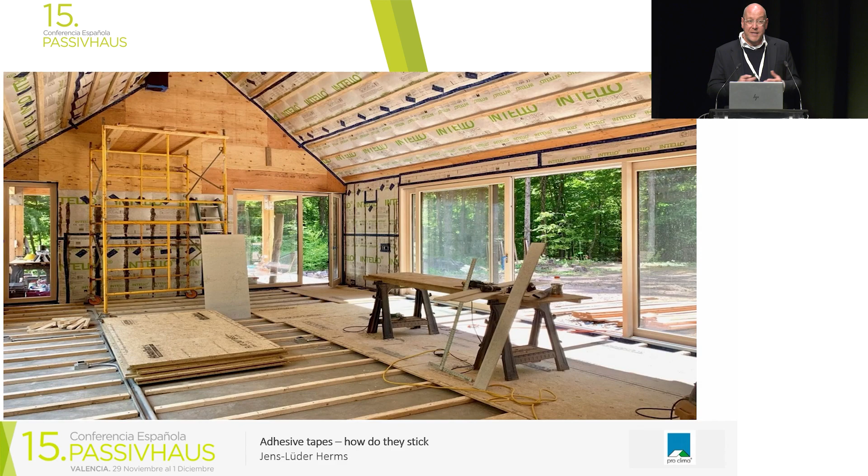But one question comes up very often to me: aren't all air tightness tapes the same? Because when we look at the tapes, of course they have different carrier materials. Some of them are made out of paper, some of PE foil, some of Spunbond. But when we turn them around and remove the release liner, we see the glue. The glue is crystal clear, and the glue looks very similar. And when we look at the technical data sheets of the adhesive tapes, they appear to be very similar as well.

They are all sticking to nearly all surfaces we find on the building site. They are all durable. They have similar age resistance. They have a similar temperature range. But when it comes to the price, then we see, wow, there's a difference. There are very cheap ones and there are very expensive ones. I'd like to show you today where the difference is in this common building material we're using.

So first, I'd like to start with the production. We have two ways to produce the glue used in these tapes. The most common one is so-called acrylic dispersion glue. Acrylic dispersion glue means the glue is produced out of dispersion. The dispersions used look like this—it's a very liquid material, it looks like milk, so it's white.

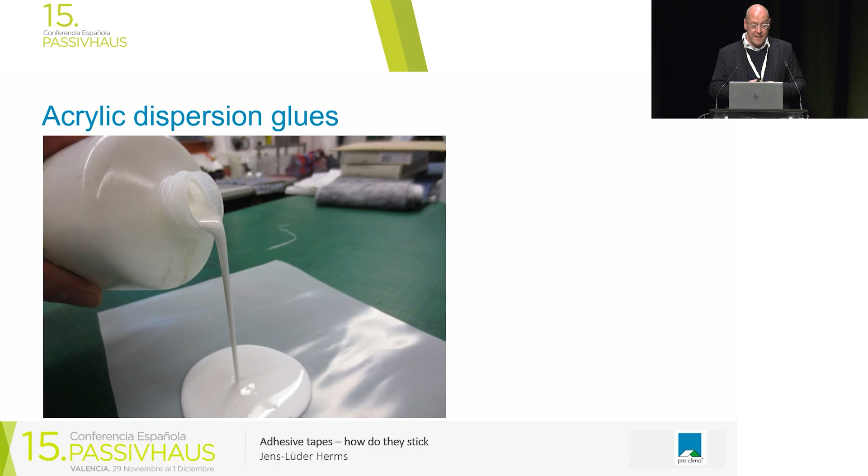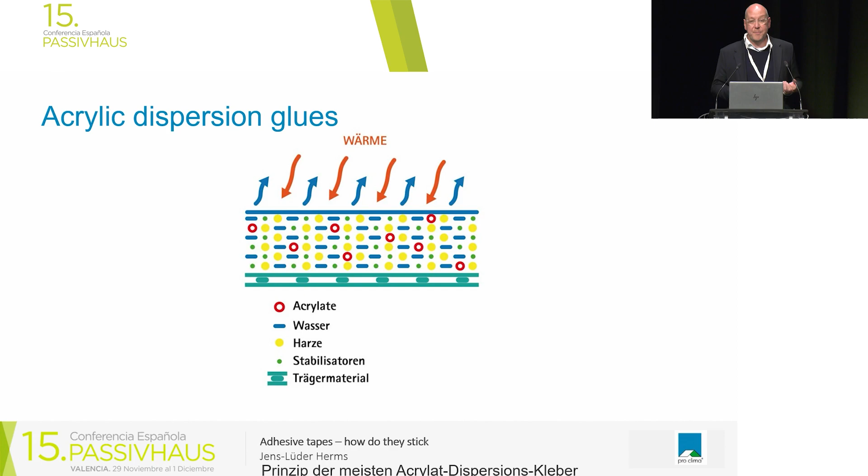This dispersion contains different ingredients. We have acrylics inside, we have resins inside, we have water and stabilizers which are responsible for keeping the dispersion stable, so the resins don't float above and the acrylics don't sink down. This dispersion is applied in a certain thickness on the carrier material, and then it's transported through a heat oven. We heat it up, the water evaporates, and during this process, the dispersion turns from white to crystal clear, as we know the acrylic glues. When all the water is gone, the acrylics come in contact and create longer chains.

Besides the acrylics, there are some resins in the glue. Resins are there to make the tape extremely sticky. Everybody knows resins from wood—when you cut wood, the resin comes out, and it's extremely sticky. But what may happen with resins after time is they get hard. The same can happen with the artificial resins used in cheap acrylic dispersion glue. They are not designed to be age stable, so it's not very good to have them in a tape.

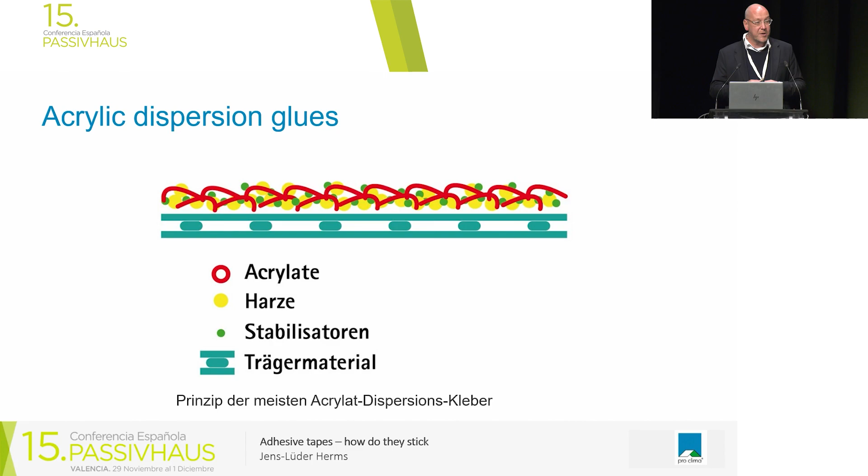The second thing which remains in the glue is the stabilizers, which were responsible for reacting with water to create a stable dispersion. The problem is that if they get in contact with water again, they will react with it. So every acrylic dispersion glue is absorbing water. I'll show you later what this might mean as a consequence when we have it in the building.

The modern glues are the solid glues. They are used, I guess, in 10 to 15% of all available tapes in the market, and the production is a little bit different. We start with the carrier material—it's 1 to 1.50 meters wide.

This carrier material is as well coated with the glue. But you see here the difference. The glue is not solved in water. It comes to the surface in a pure acrylic in a very liquid form. It is very liquid because it consists of very short solid acrylic chains, which are not connected with each other.

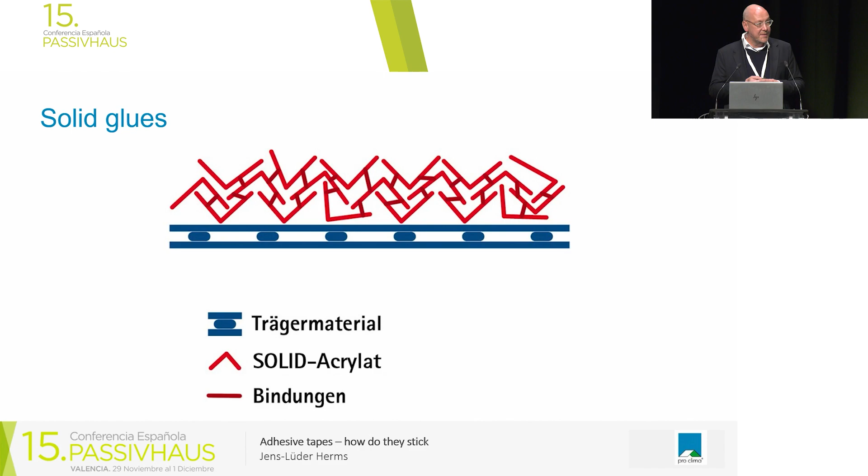During the production, you can bring energy to the surface, and then they are creating these bindings between the short chains. So during the production, you can decide if you want to have a very hard or a very soft glue. The good thing is that this glue is free of stabilizers, of emulsifiers, and it has normally no resins inside.

There can be a very small content, but in general they are resin-free. The good thing is there are no stabilizers inside, and so the glue is absolutely water safe. It's not getting water in its structure. Good, this is the difference between the production.

But how does the tape stick? When we want to understand this, we have to consider two forces. We have on the one hand adhesion. Adhesion makes a connection of the glue with the surface. And the second force is cohesion. This means the inner strength of the glue. If we have stress on the connection, the stress transports through the glue to the other side, so that we have a good bonding.

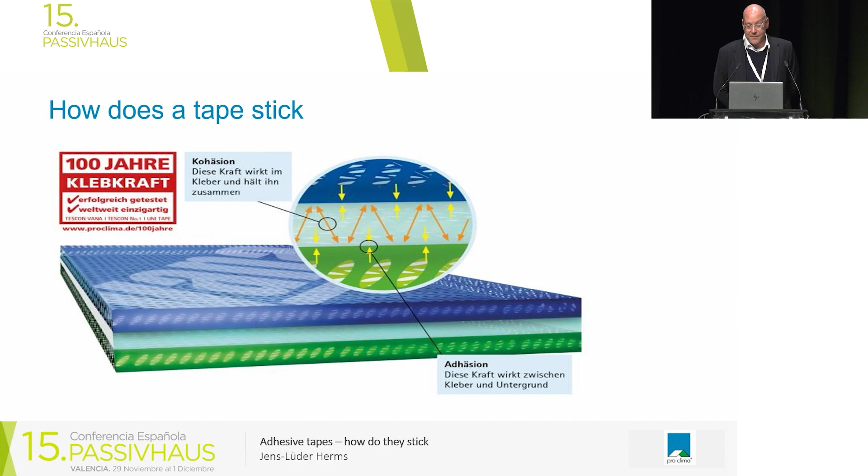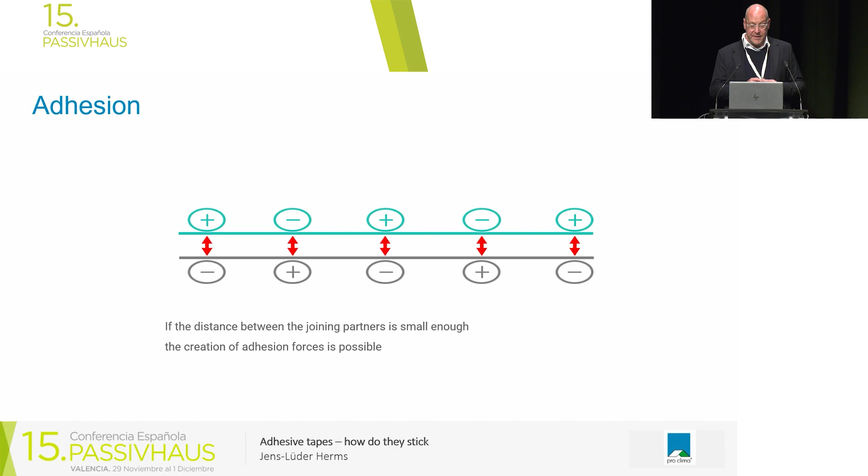Adhesion always occurs when we bring two surfaces which have a high energy level close to each other. And when they are very close, they can create this chemical adhesive bonding. This is very important, to bring it close to each other, because when we take a look how a membrane looks like under the microscope, then it's very uneven.

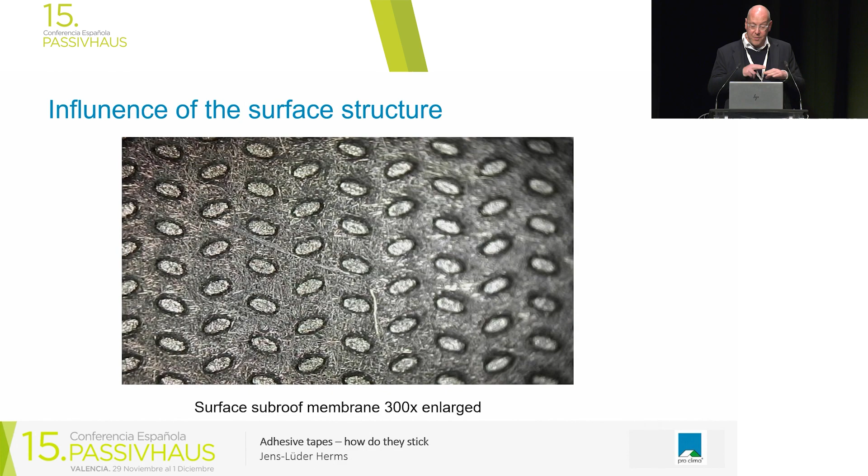And when we bring it to a theoretical image, a subroof membrane looks a little bit like this. It is a very structured surface. And the better the glue can follow this structure, the longer the distance is where we can create adhesion, and the better the connection is.

This is why all the glues for airtightness are called PSA glues. This means PSA means pressure sensitive adhesive. And we have to press them to the ground. We can use our fingers, or we can use a tool like this press fix here, or we can use a roller. But the intention is to press the glue into the structure so that we create a very strong bonding.

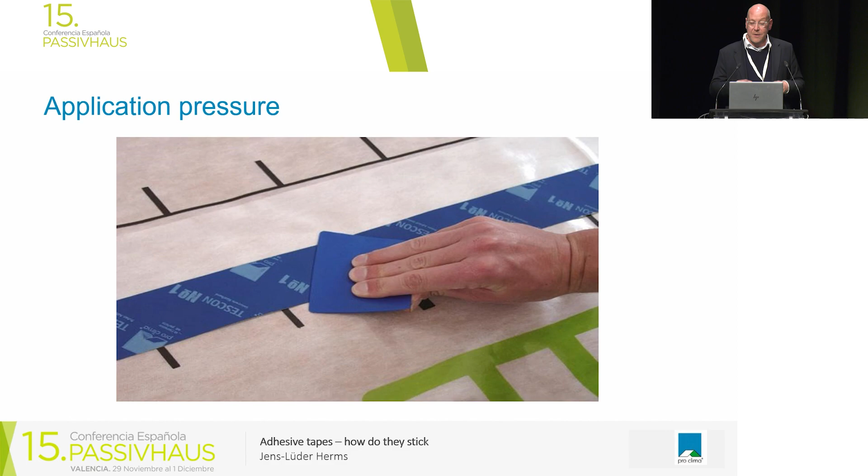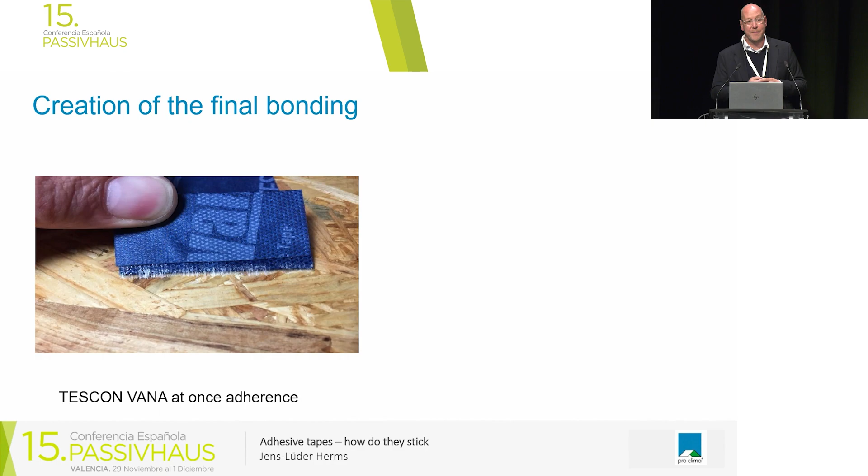And we have the second effect, shown here. When we stick a tape to the ground, here is an example on an OSB board, we have at once a good bonding. But if we wait a couple of hours, the glue has the possibility to flow into the surface and can cover all the tongues and grooves. And if we try to remove it later, we need much more force. So you see here what happens when I make the test with the same tape after 6 hours or 8 hours. The adhesion strength is getting clearly stronger.

And this is something for you to know: when you stick a tape to a surface, just give it a couple of hours to create its final bonding.

On the building side, we are working with kind of big glue thicknesses. In general, we have glue thickness above 200 grams per square meter, but the development is going into making the glue even thicker. So we have glues on the market with 260, 300 grams per square meter. And the bigger the glue thickness is, the more attention we have to pay on cohesion. And cohesion is the inner strength.

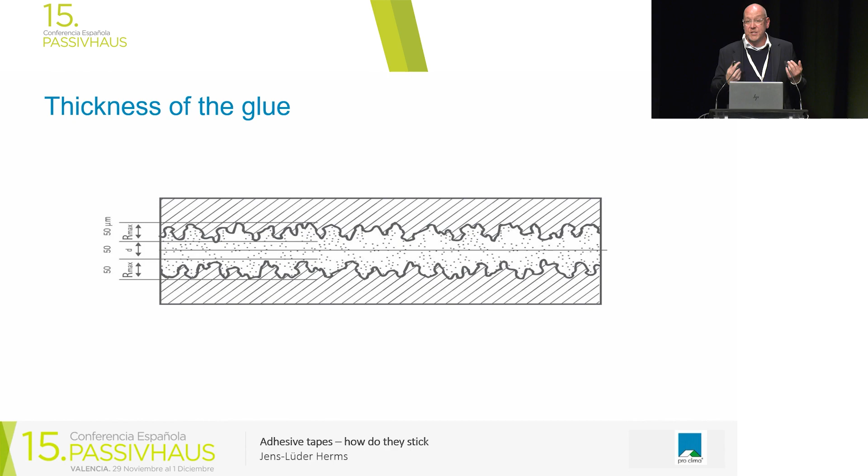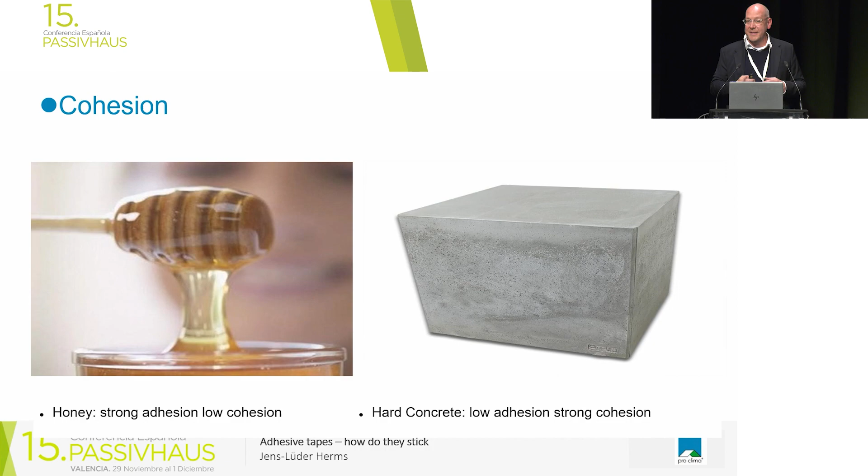The second extreme is dry concrete. So if we touch dry concrete from the side, we have no adhesion. But if we lift this concrete with a crane, it will not tear apart. So dry concrete is a very cohesive material but has no adhesion. Good, so what does it mean now for the perfect air tightness glue? This is the question.

The question is, which force must the tape resist? Must it stick like on a thumb test? This is a test everybody does - taking the tape, removing the transfer liner, putting a thumb on it, and depending on whether you had finger food before, you get the appearance it's sticking well or not. A very soft glue gives the impression it's very sticky, because the softer the glue, the faster it penetrates into your fingerprint. But as fast as it penetrates in, it can penetrate out.

Or should a tape resist short and strong tear forces? This is another test - people stick the tape somewhere, wait a couple of minutes, then tear on it with all their power, and depending on whether they destroy the surface, they say it's a good glue or not. Or should it resist small but long-lasting forces? I guess the answer is clear. This is what we found in buildings for decades - 10, 20, 30, 40 years.

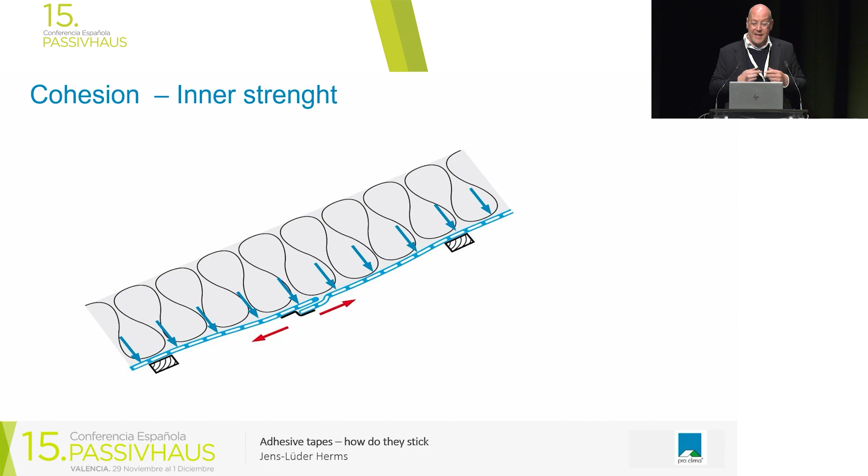So we have a connection with the tape, and there is a very low pressure, maybe from the insulation material, pressing on the tape connection. Against this force, a tape must resist.

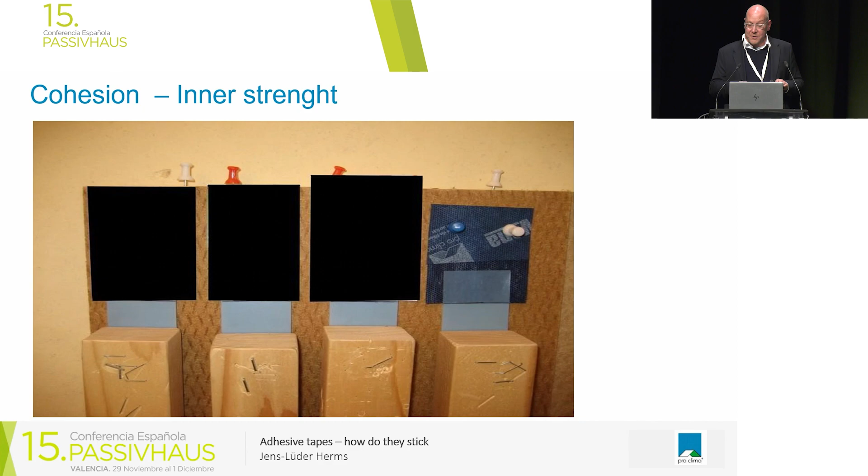You can test it very simply at home - this is one thing I'd like to bring you closer to. You can test the quality of the tape you've chosen yourself. This is a very simple test I made in my office. I took wood weights of 200 grams, cut pieces of a PE membrane, and made a line on it. I stuck it for 24 hours, then hung it up and waited to see what happens.

So this is directly when I hang it up. This is after 24 hours. You see the first tapes are already moving, and after 48 hours, one tape is nearly collapsing.

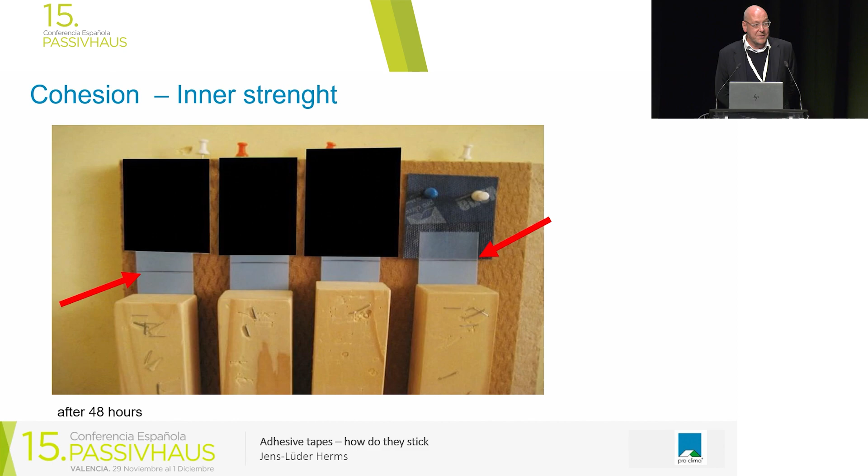And of course, I know which tapes are good and which are bad, because we made this research in our laboratory where we put 56 tapes with the same weights, hung them up, and just waited to see what happens. I made this picture 2 days after I hung it up, and already 3 tapes had collapsed.

But after 3 years, only 5 tapes out of 56 are still resisting the force. All the others collapsed, and they didn't collapse after 2 weeks or 2 months - they could collapse permanently over the 3 years. Some after 2.5 years, some after 3 years.

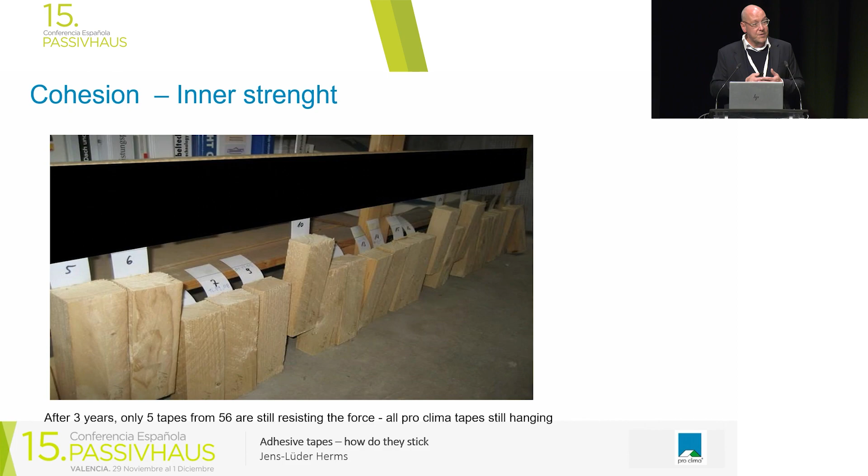Some glues turned yellow. This was a sign that they have a lot of resins inside, and become brittle. But only a few glues retained their strength. So it's very important that the glues you choose have a very good combination between inner strength and adhesion. This is the first thing.

So the test most people do - finger in the glue to see if it's sticky or not - is not really realistic. These are normally soft glues, and they only seem to stick well; normally they have low cohesion. The ideal glue combines a good initial tack with good cohesion.

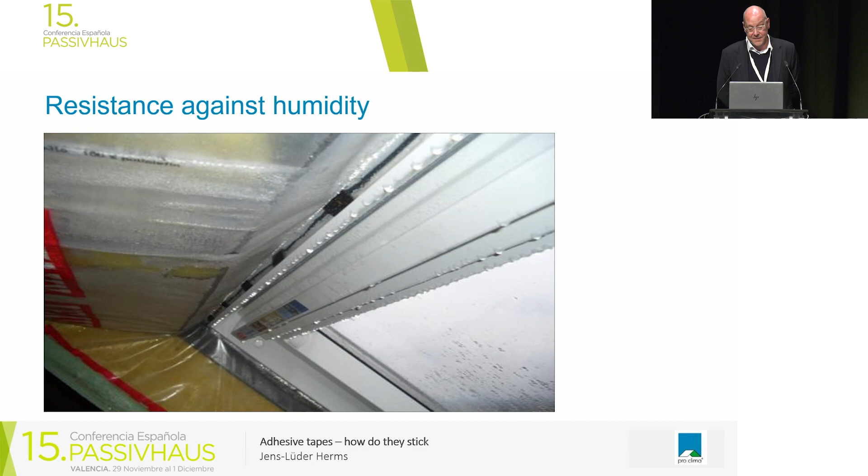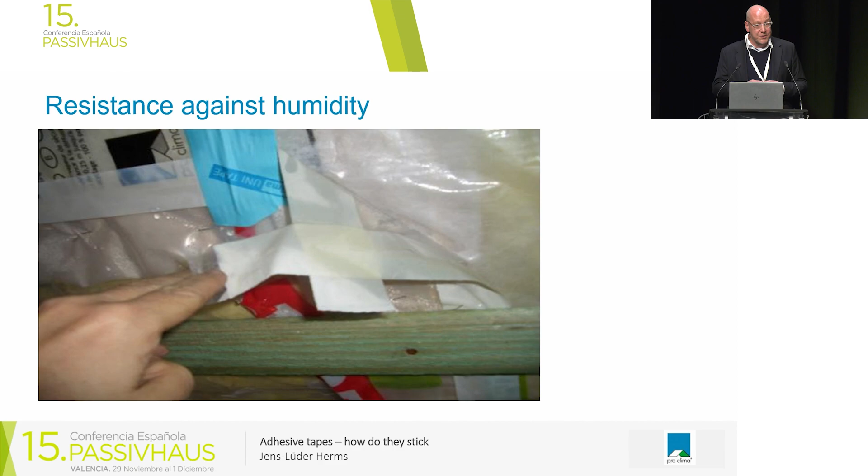The last thing I'd like to show you is humidity, and this is a very nasty example. This is a newly built house where they put the screed in and did not ventilate, so water was running from all surfaces in the house. Unfortunately, they used the wrong tapes - these are tapes for a painter. So they are loosening, of course, but here you see even a quality tape produced out of paper is not optimal under this water stress. But so much water should never be found within a building.

Good. Where's the difference between acrylic dispersion and solid glues? This small research shows it very clearly. We stuck 2 tapes on a sub-roof membrane.

We waited 24 hours and then stored it for another 24 hours underwater. You can see the acrylic dispersion reacted with water.

It turns from crystal clear to white, and it loses adhesive strength. Solid glues have no effect when underwater. Just remember how it's produced. After production, we have these emulsifier stabilizers inside.

They react with water, and then they lose their adhesive strength. One thing I have to point out with these acrylic dispersion glues is, of course, it's an old technology, but there's a quality difference in the market. There are cheap glues and there are more expensive glues.

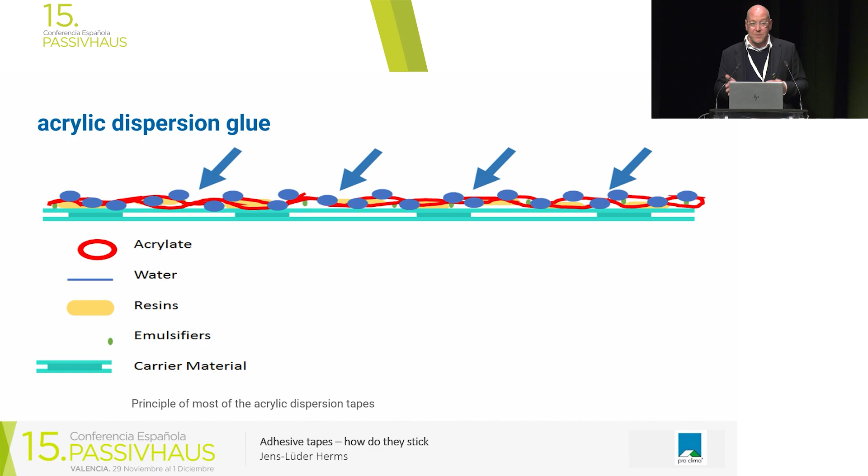You can use cheap resins, or you can use more expensive but high quality resins. And this has, in the end, an effect on the price. In general, what I've learned in my 18 years working with these products is that there is a clear combination between price and quality, even if the data sheets look very similar.

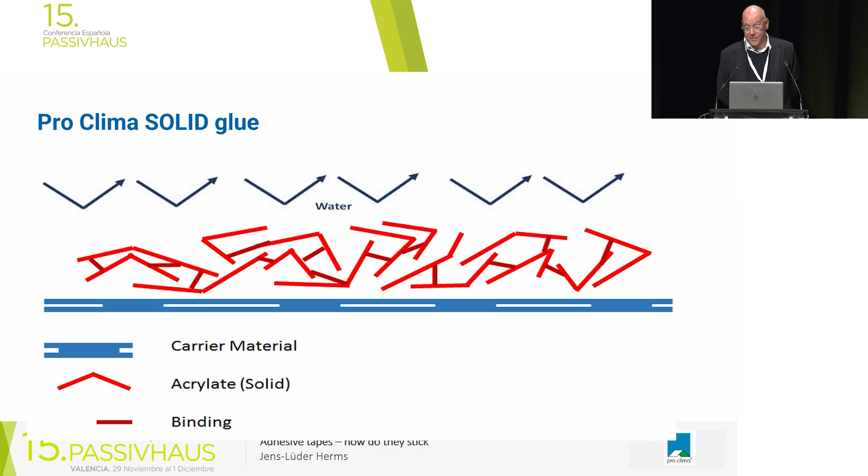Good, acrylic solid glue is absolutely water safe because we have no emulsifiers inside. I think on a building site we should use tape which is resistant against water, because water we have on all building sites.

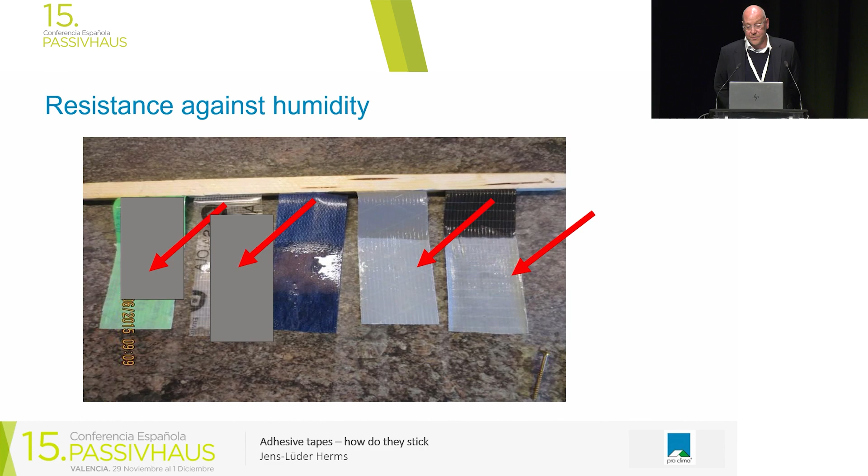And here again, you can test what quality the tape you have chosen has. Just take it, put it for a certain time underwater, and then you will see if the glue turns white or remains crystal clear. If it's white, you have a dispersion glue. And then you can even test how highly the glue is affected.

This is a very nasty example where you can remove the glue after putting it underwater with your fingers. Good. Last thing is, okay, which tape you can trust.

I can say, of course, experience is very important. So I've seen so many brands of air tightness tapes come and go, and there are only a few which have long time experience in the market. If they are long time in the market, you can say, okay, they know what they are doing.

And of course, we now have artificial aging tests existing. The best is, of course, if they have been done by an independent site like a university, and then you can be sure, with this experience and a good artificial aging test, that you have chosen a good product.

Good, the conclusion. There are different ways of producing air tightness tapes with acrylic glues. This is the first thing you should know. They aren't the same. And even acrylic dispersion glues have differences in their qualities. Initial tack and inner strength of the glue must be well balanced.

The thumb test is not a reliable test for you to judge if a tape is good for a passive house or not, or good for durable air tightness or not. And not all glues are water safe due to their way of production. Artificial aging tests are existing.

Ask for them. Good, I'm now at 50 minutes and at the end of my presentation. For such an intense topic like air tightness tapes, it's quite too short, but I hope I've given you a first impression that not all tapes are the same and not only the price is different. So we have a lot of differences in terms of quality.

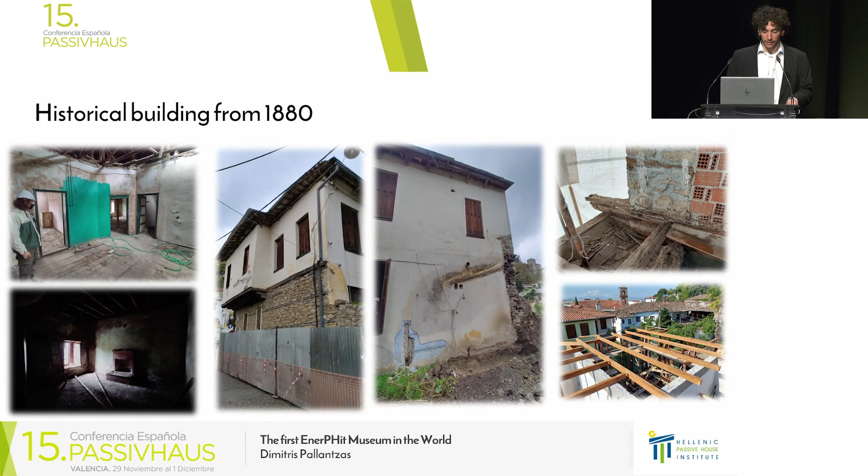That's why the municipality hired us, let's say, to be the consultants of the consultant. So what we are trying to do at the moment is to create a network and consult when something is very, very difficult or needs extra work. The municipality prepared everything like the PHPP, but we did the rest of the job in terms of more deep research and advanced modeling techniques.

The process is again the same as you are doing here in Spain, as everyone is doing everywhere in the world: design phase, implementation study - where to put everything, how to install, etc. - and construction. In this particular project, we had a lot of issues regarding legislation and materials.

As Jens mentioned before, we are all fighting for quality, all of us: quality of engineering, quality of materials, quality of technicians, quality of construction. So sometimes it's very, very difficult to find everything at the same time when you need it.

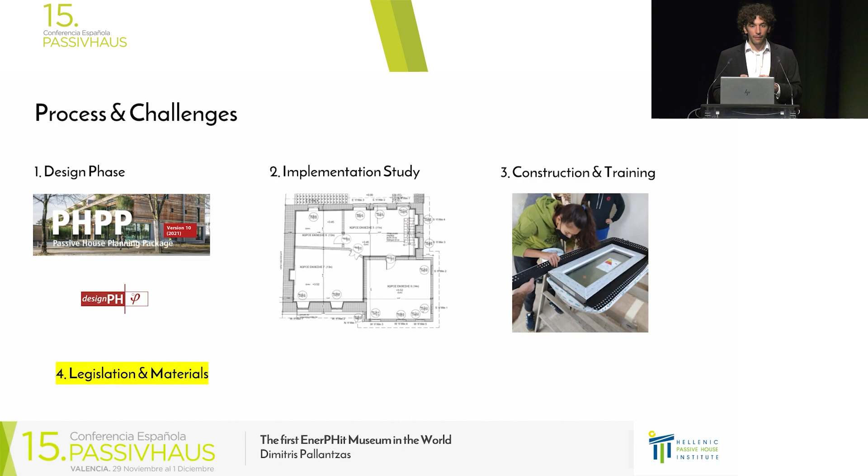In the design phase, what we did was the following: we did the PHPP study, and the municipality did the PHPP study and the designPH study. As you can see, the project is going to be certified with a component method because it was impossible to reach the energy standards. The question here was, is it enough for this building? 95% of buildings are fine to model with PHPP and design PH because it's far better than the conventional modeling techniques that everyone is using.

But in 5 or 10% of buildings, you need more. And by more I mean, especially when we have interior insulation, you need to take care of the vapor. Because air tightness and vapor tightness are not the same - if air tightness has a molecule like this, vapor tightness is like this, so maybe the air cannot go in, but the vapor can. So you need to create these kinds of studies in order to be on the safe side.

Of course, you will never know exactly what a 150-year-old stone's density, porosity, or water content is at any given moment. So even with the best software like WUFI, which we did together with my colleague here, Roberto Ianetti, we still weren't sure it would be 100% correct.

So what we also did was detailed thermal bridge analysis to detect potential issues, and dynamic simulation to design thermal comfort, because we had different rooms - some wooden, some stone - with different usages, since it will be a museum.

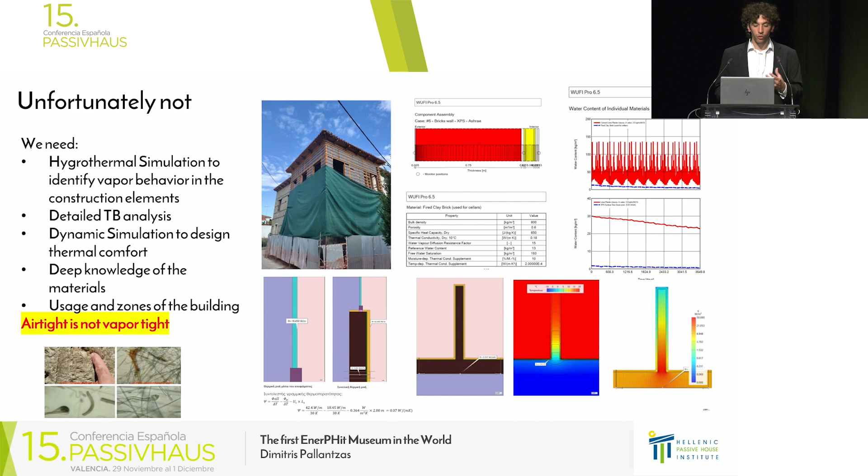Last but not least, it was important for us to dig deeper into materials and understand how each material works and what is better to install in that kind of situation. According to our experience, if you have the possibility to install exterior insulation, go 100% for that. But in some cases, in historical or heritage buildings, you need to do a process like this.

So what we did was the following: we created 2 different studies and reports - one for the engineers at the municipality to add value to their knowledge and be ready to implement it, and to design every single detail accordingly, how it should be installed.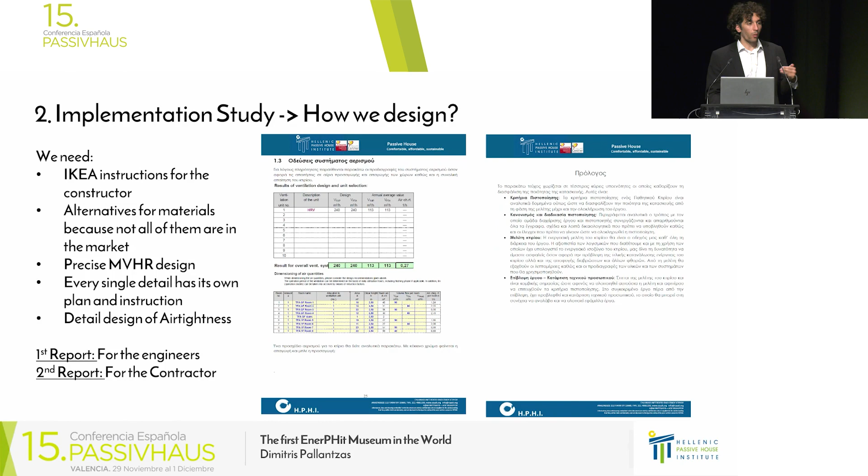And the second thing we did was one report with 110 pages for the constructor. We provided him like IKEA instructions, how to do every step correctly, simultaneously, and which are the most important parts of the building that he needs to take care of in order to avoid mistakes.

We needed to find alternatives for the materials because the building was built during COVID, so we didn't have the materials we expected to have, especially for interior insulation, which needs certain materials.

As you can see, we designed every wall. Every wall, he needs to know exactly what to install and how to install in each wall. We explain why we did this, because it's not a matter of trust. He didn't even know what a thermal bridge is, the constructor, because it's not the constructor of the municipality. It's like they offer, and according to the offer, they get the job.

And also, as you can see for the hygrothermal analysis, we did many different options in order to be ready to design what is going to be implemented. So we took one step back to design more, but to be ready to implement.

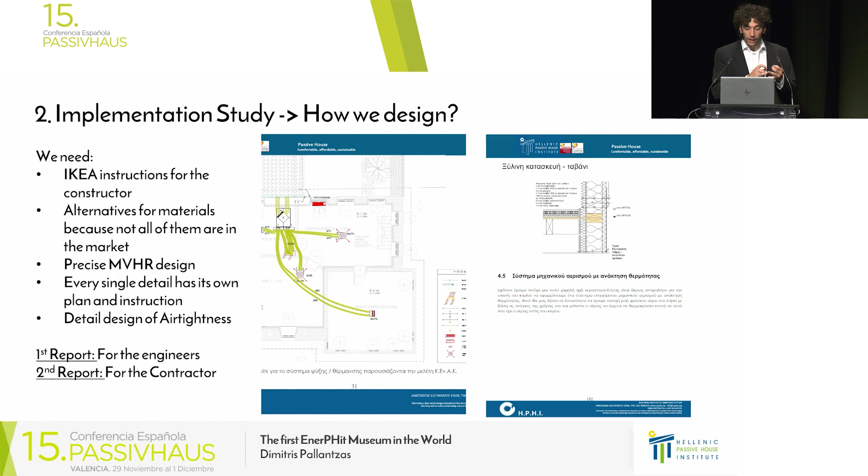Detailed analysis of the windows, where to install, how to install, and why to install. Every detail has its own plan and instruction. We did a detailed analysis of air tightness, and other courses there, also details.

So with all of this, we come to the third part, which is the construction. Normally what we do is we provide the study in the main of the projects, and we supervise what is our responsibility regarding the passive house concept.

In this case, it wasn't that. We knew that it would be a problem, so we arranged a 3-day workshop only for the engineers and the contractor. We arranged a 4-day workshop, as you can see in the first image, for every worker and manufacturer in the area with different types of materials.

Not only do we want this material, because it's not our job. Our job is to explain what is needed, and they are responsible to find the correct materials.

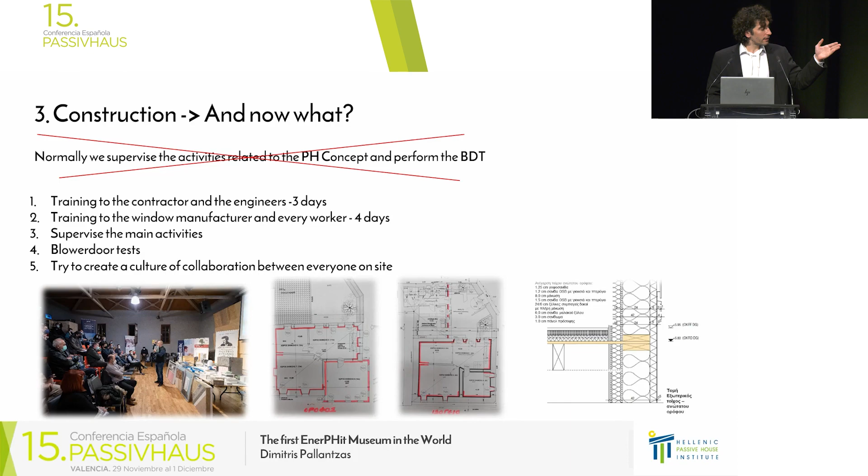We supervise the main activities, we perform the blower door test, but most importantly, we try to create a culture of collaboration between everyone involved in the project. So from initial plans and plans that a worker can understand, to detailed analysis of every construction detail.

Of course, we had a lot of challenges. That's why I wanted to present this project, not because it's good and, okay, applause. No, it was a terrible project with very many difficulties, some of which we couldn't avoid in the end. Even though we provided a very detailed technical analysis, we were there, we provided training, whatever.

So we didn't have the proper insulation material, so we installed EPS, which is okay, but it's not the proper material for this particular building. We could have had a better one. The contractor didn't want to buy the best products due to price rising, which is normal.

The archaeology department didn't allow us to change the wooden windows of the Sachnisi, which is this one, which was reconstructed, so we couldn't enlarge the depth of the wooden window frame. So we researched the possibility to install vacuum glazing, but when we saw the study in the PHPP, it wasn't necessary, and it was far more expensive.

And after all these activities, we assumed that everything would go perfectly. The first blower door test was 3.85. Okay, it wasn't 7 or 8, which is normal for buildings in Greece, maybe in Spain 4 or 5, I don't know the air tightness level, but we don't even have a regulation.

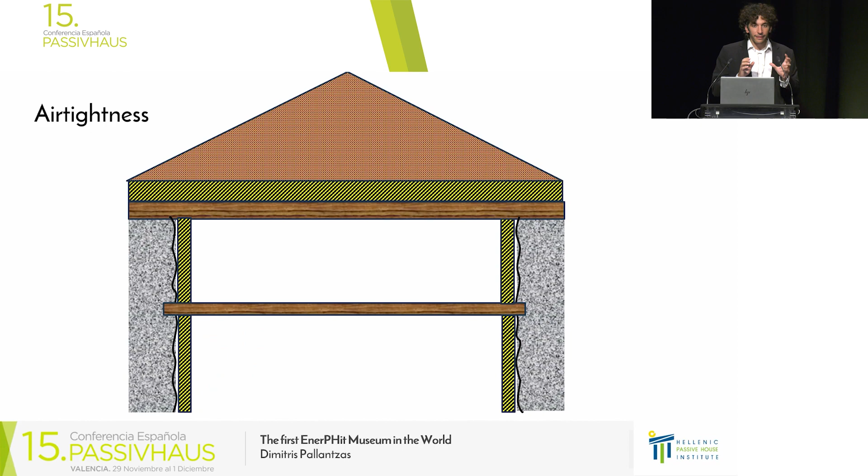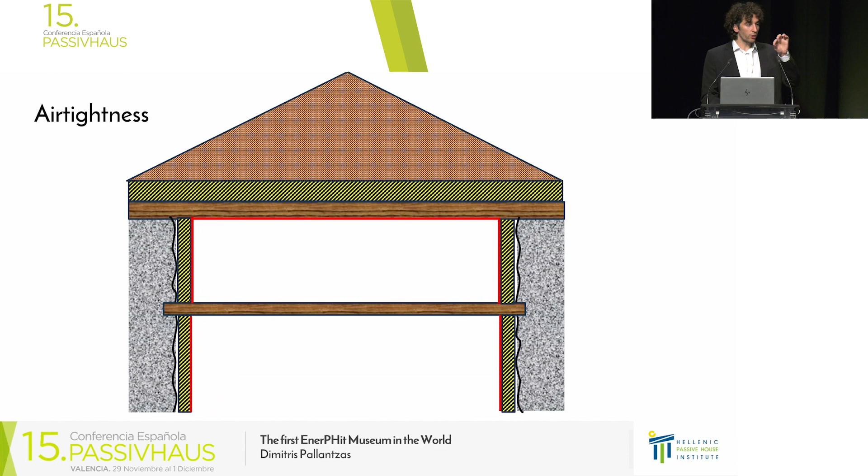So, simplified, what was the problem with air tightness? This was our envelope. We decided to install insulation, but the wall, of course, wasn't straight. So we tried to create straight walls with plaster and glue, but the main problem of interior insulation is air going behind the insulation. This is where mold growth and condensation occur. So our initial air tightness layer is this red line. We had the wooden floor and the wooden roof with insulation above.

The first test was 3.85. We tried to solve it. The second test was like 3.2. So we put smoke in the whole building, and the workers outside saw the smoke, this green line, coming out of the rooftop, which was outside of the thermal envelope.

So by searching and searching again, we found that the air was going through the ground, through the wooden floor, even though it was sealed, and through some corners, going up, and we saw the smoke coming out of the chimney, let's say.

So we reconstructed the air tightness layer, hoping that it will work, and we tried to separate both rooms, like this and this. There is an interior staircase, but we taped everything, every corner. We put an adhesive to the intermediate level, which was wooden but not visual. And we came to a final result of 0.85, which for us was a miracle, because we thought okay, we did a good job, but in that kind of project, it's impossible to get certified.

But this is going to happen, not because of us, not because of me, and not because of our team, but because of the culture of collaboration, because the contractor, from the first time, was able to collaborate with us. We tried to convince them that this project is going to be good for the society and for the municipality and for their work. We weren't there to say, you know nothing and we know everything, do like we say. This doesn't work, at least in Greece, I think worldwide, but at least in Greece.

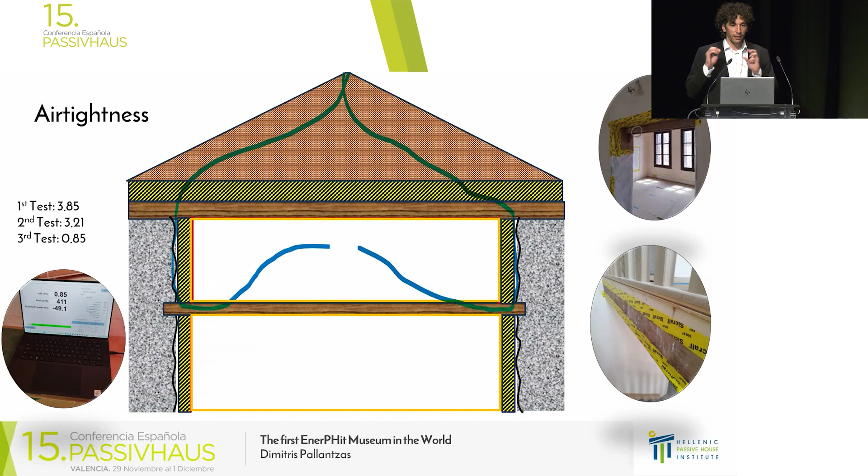So he tried extra with his technicians to work on it and to find the proper solutions. So conclusions, value engineering. What you all do and what we are doing is very, very important, because we are paid once and we are delivering everything in detail. So we're minimizing the cost, we are minimizing the human error, and we are accelerating construction.

Collaboration, it's not one-man show. Passive House needs a team, and not only a team within an office, exterior partners, partners for materials, which are going to supervise and tell you what is important to take care of or not.

And be flexible on site. We were flexible on site by going deeper in our knowledge. A lot of material producers worldwide are providing a lot of information. We need to go deeper into that in order to understand how the material works. And then on the construction site, we find solutions. These are the three main conclusions that we had from this project.

I think you also have heritage buildings in Spain. I wanted to show you this because everything is possible. You have in Spain maybe one of the best scientists in Passive House worldwide. So take advantage of them, and if we can share our knowledge, we are here to do it.

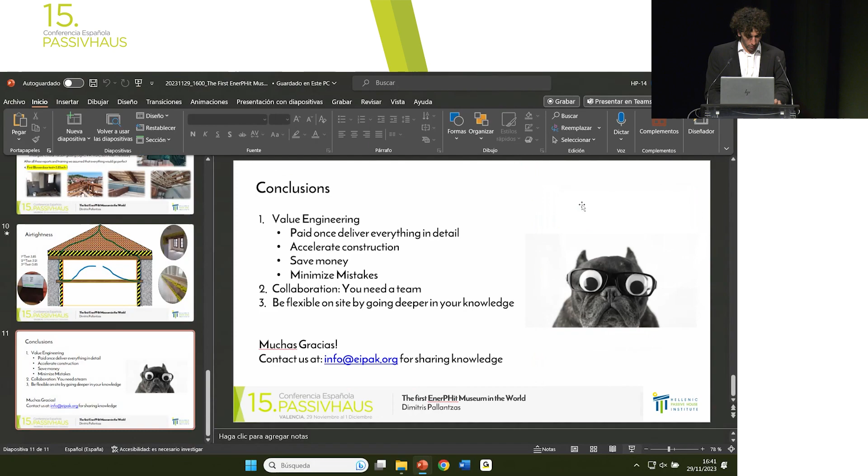This was the first technical part of the presentation. So I need to switch, Leonardo can do it maybe, and go to the second part, which is more social, more like creating culture, more like creating policy, which is important. The knowledge is here, but politicians are not, or decision makers, or investors, or whoever.

And the Passive House is something that is helping everyone, not only clients or engineers. It's helping the society to grow. So this is the Passivistas project, which is a renovation of a multifamily building, almost 600 square meters, 8 apartments in Tavros. There is a long story behind it.

So there was a war between Greece and Turkey, unfortunately, even though the people love each other. And the refugees came from Turkey and they were living in tents. So the government in 1960, 1970 tried to build that kind of buildings. So in this region there are more than 500 identical buildings. So these families now are living below the energy poverty limit.

And they have no incentives, no money to even renovate their buildings, let alone heat them. These buildings have no heating system, no cooling system. Some of them have one air conditioner, 30 years old. They are old. And of course, as you can understand, in a multifamily building, they cannot collaborate and they cannot agree on decisions.

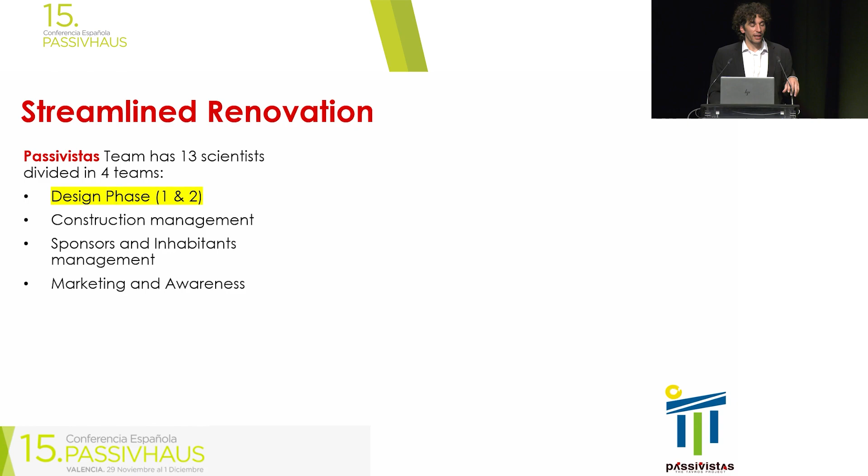So streamline renovation, it's a new word which maybe you are not familiar with, but we are trying to explain. Passivistas is the team of volunteers and engineers who are working on this project. Our office has 9 persons and 4 more are voluntarily helping. We are divided into 4 teams: design phase, construction management, sponsorship and inhabitants management, which is very important to convince them and say, yes, we will do it, don't worry, we are not stealing from you, etc. And marketing and awareness.

This is a process. Normally we do the PHPP and design phase and then construction, but we have implemented number 2, which is an implementation study, where we are separating every kind of activity: construction details, air tightness details, 3D ventilation design, window selection, construction phasing, etc. And the energy study we are starting to accelerate. We want to accelerate. We had 3D scanning, so we had the BIM model. From the BIM model, we had directly the PHPP, etc. And then site supervision, of course, and monitoring and certification.

With all of this, we are aiming at 3 main things which are important for everyone: quality, time, and cost. So streamline renovation, in one sentence, is achieving EnerPHit, the best possible standard, while the people are living inside the buildings. Sometimes you can do it with prefabricated elements, but when you have balconies in Greece or in Spain or in Italy, it's not possible to just have 4 walls and you are ready.

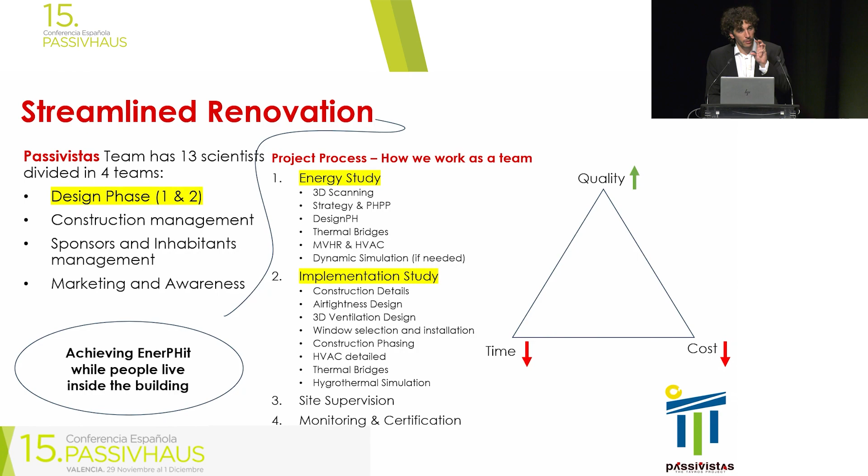So you need to accelerate and provide innovation in the process and the construction phase. So number 2 was the most innovative part that we did. We raised the quality and minimized time and cost. And this is not only good for people who are poor and cannot install everything, but it's also important for investors, for private buildings, multi-family buildings, large-scale buildings. They saw that and they say, I want this, because this accelerates my work, this saves me money, and this raises the quality. How do we achieve it?

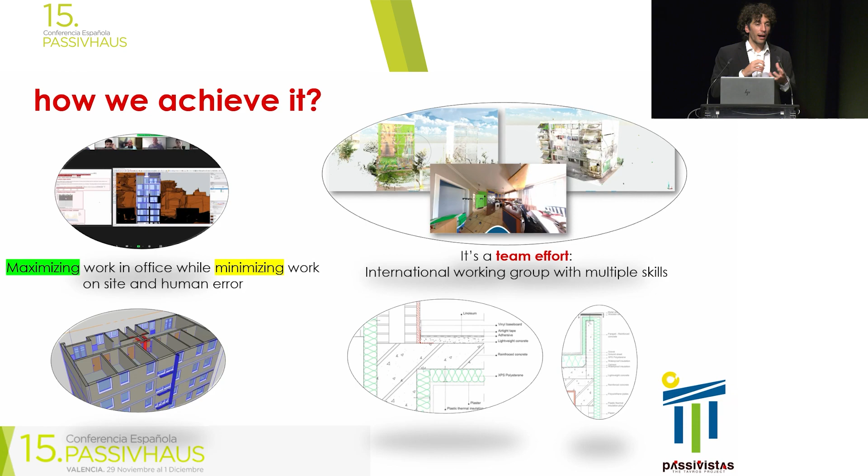We are maximizing work in the office while minimizing work on site and human error. So we know exactly what we are going to do, 90%. Of course, we cannot be 100% ready for everything. So we design detailed ventilation design, as you can see, 3D everything, design detail with materials, and 3D scanning, which is a new technology and helped a lot. I have to say that it's not 100% ready to be adaptable, and it took time to translate the BIM model 100%, but it's something that will accelerate our work in the modeling.

Which tools are we using? The first tool we use, because we are working internationally with partners all over the world, is communication. Even in the PHPP file, and that's why I put the image, we created new folders—and I know a lot of people here are experienced creating different types of this—for the critical points of one building, in order to accelerate communication between us. So communication is the most important tool that we have as a team.

And this is the first thing I would say you need to incorporate in your teams. Then we have design and management tools. Apart from PHPP, designPH, or Flixo, or Thermal Bridges, sometimes it's needed to provide dynamic simulation in difficult buildings with Energy Plus, or Honeybee, or similar, or software like CFD analysis, because this is not only important for us as engineers, because we have the experience to understand if an aluminum window without thermal break would raise or minimize the temperature in this area, but it's important also for the client.

So if a client sees that and says, look, if you decide on this window, this is the daylight, but imagine the thermal comfort. If you design this window, then you have that kind of losses and that kind of thermal comfort inside the building. So we need to take care of this also for marketing reasons sometimes, but also for us in complex buildings, for scientific reasons.

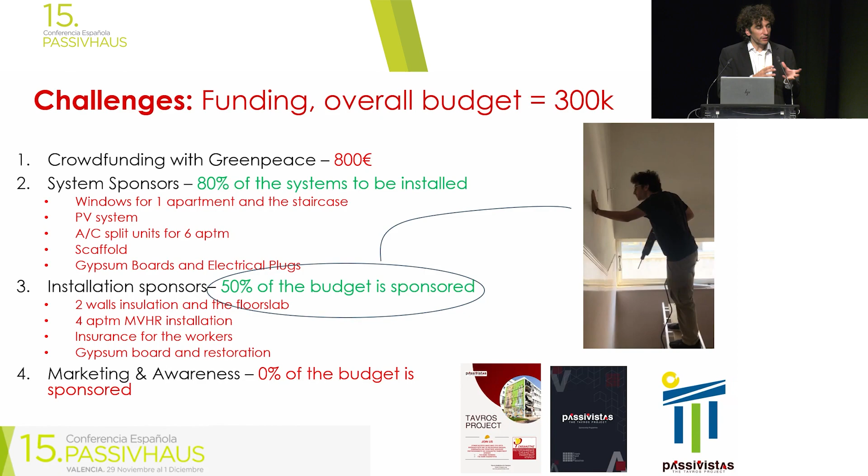Because we have a lack of installation sponsors, and we wanted to start with one pilot apartment of the 8 in order to convince the others, we said okay, we need to do it ourselves. So it's not only that we are supervising or giving instructions - the ventilation system and the windows, we installed them together with one worker. We did it ourselves, which is important in this project because the people understood that we want to do it, and that it's not a marketing campaign of a big company.

We're very proud to have already 18 sponsors. Companies like you have here in Spain support us, and mainly they support our idea. This is an honor for us and we appreciate all of them - windows, ventilation manufacturers, everything. What we are aiming is to create a living lab there for 5 years.

We are already monitoring every single apartment for 1 year - temperature, relative humidity, indoor air quality, CO2 concentration, everything, and consumption. We will monitor for 5 years, and we will create a living lab for students and professionals to come there, to see, to train, and to be ready to implement in the other 500 buildings.

250 are identical, so we already designed with District PH, a software from PHI - like PHPP but for districts. We already made those simulations in order to involve key stakeholders like ESCOs. At the moment, the ESCOs in Greece only change the lamps, nothing else with buildings. We try to incorporate funding schemes together with banks, the state, the public power company, or the DSOs, the distributors. We provide investment assurance, which is passive house certification, like we do. This certification assures the balance, assures that everything designed will be implemented.

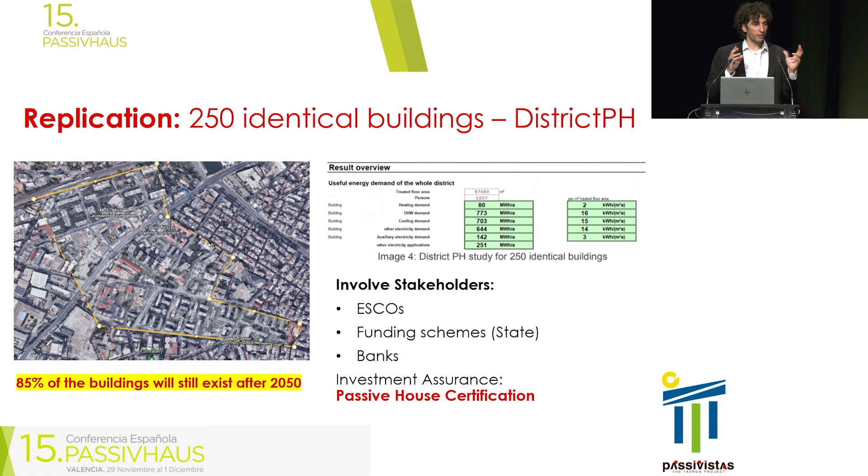And we like renovation because 85% of the buildings will still exist after 2050. So there is plenty of work, not only for us here, but for every engineer if someone wants to get deeper into the passive house concept for renovations.

The social aspect - we want to tackle energy poverty. You think like Greece, Athens, Valencia, we don't have winter, but we have. The heating system was a jacket because there was no central heating. Cooling system, random. Minimum temperature for one day we measured 11 degrees, and at one particular time we measured 8 degrees during the winter. Maximum temperature, 37. The budget for the renovation is 0.

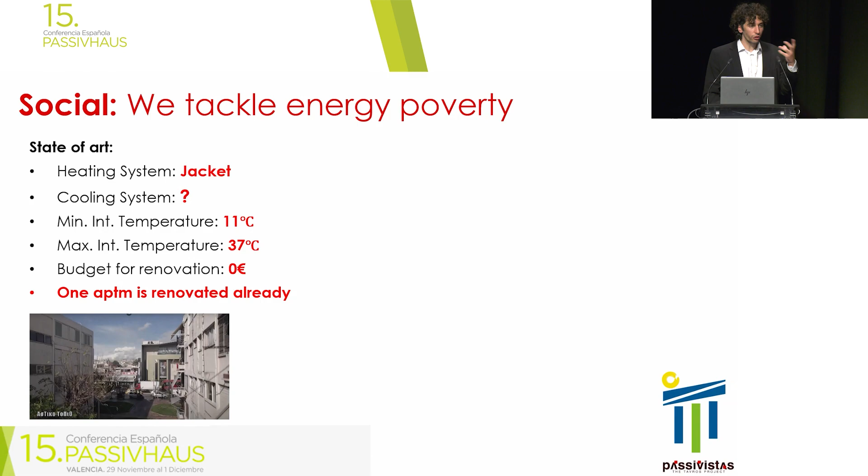And one apartment is already renovated, and that made a channel in Greece create a documentary about this particular project to raise awareness and to thank us. But the most important thing that happened to us in this project is that the owner of the one apartment that was renovated the previous winter told us: I had money, and it was the first time after 15 years that I went with my wife to the theater. So passive house is not only energy consumption, energy demand, and calculations - it's a lifestyle. And it's a lifestyle that everyone can have with our knowledge and the funding schemes that exist.

The other social thing is that we have a lot of immigration. Maybe you have also, Italy has also, everyone. So immigrants are not integrated into the communities, because the communities try to put them away, keep them away, or not bring them together.

So they are stealing, they are doing things in order to survive. This is normal in Greece and in the Mediterranean.

So what we try to do in this project with 10, 20 people, we will not save the world, of course, but together with Odysseia, we will train and educate refugees as workers because we are missing technicians with the Passive House Trade Persons course, and they will work together with our technicians in order to be ready to be adapted in the market. So why, I was thinking, while we were traveling, this is the last thing I would like to say, we're thinking why we do that, why I came here, why we wanted to present this to you.

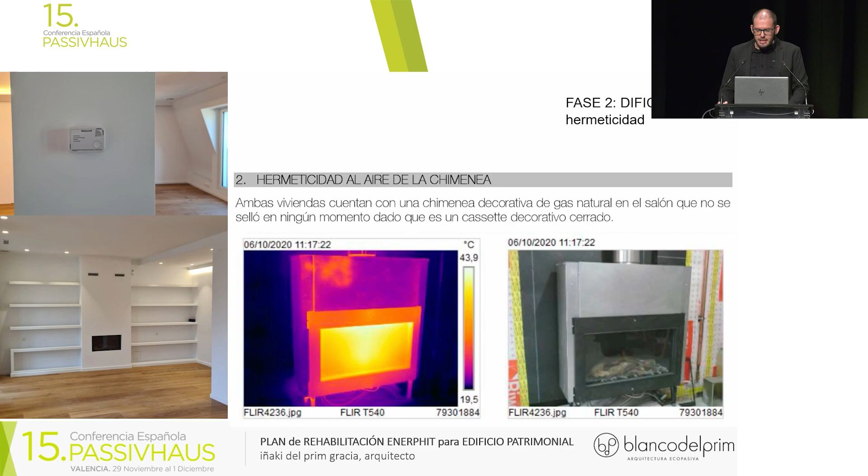La ventilación y la climatización van siempre separadas por cada unidad. Para la ventilación llevamos un sistema en estrella convencional, y para la climatización y ACS, full equip. Teníamos caldera de gas, requisito del promotor, que alimenta el ACS y unos radiadores. Para el verano, climatización por aire mediante aerotermia, con la unidad exterior en cubierta, y además una estufa de gas natural.

¿El porqué de los radiadores teniendo esa estufa y una climatización al uso? Pues por esa desconfianza en el confort que nos da la climatización por aire en una vivienda, y esa necesidad o ese querer tener superficies radiantes por pequeñas que sean. Y la climatización también nos ayudaba en parte al tema de la humedad.

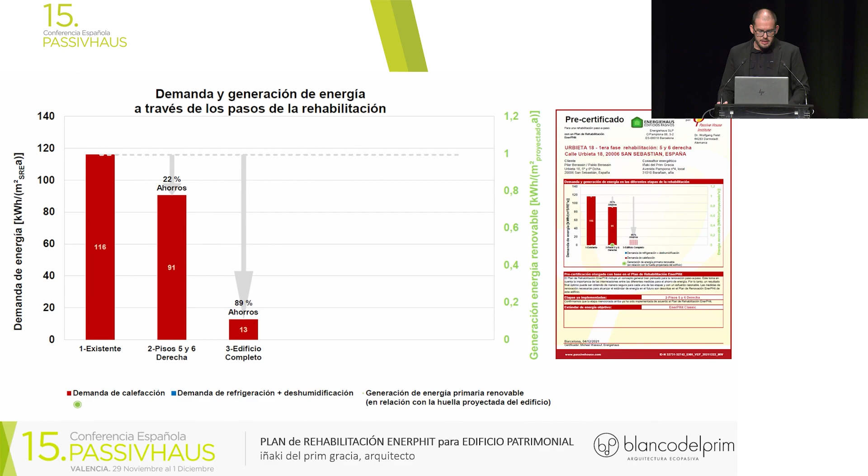Aquí veis un poco el resultado del plan de rehabilitación. Con las actuaciones de esa pequeña fase 1, de patios y los 2 pisos, conseguíamos ese 22% de ahorro, por encima del 20% que piden, y si se llega a hacer todo, se alcanzará ese ahorro casi del 90%.

Más allá del interés que tenga el ejemplo, traía unas discusiones, unas reflexiones para compartir y hacer un poco de debate. La primera pregunta que nos surge después de esta experiencia es si es rentable una rehabilitación EnerPHit en un edificio de este tipo.

Dimitris nos ha explicado muy bien qué es todo lo que deberíamos hacer en el caso del museo. Eso es complicadísimo, carísimo, y la garantía de éxito de todas esas soluciones es francamente complicada. Nos va a requerir en estos edificios multiresidenciales, normalmente antiguos y catalogados, ir a instalaciones siempre individualizadas, tanto para clima como para ventilación mecánica, porque no vamos a tener espacio para instalaciones comunes. Eso va a encarecer la intervención.

Y esa necesidad de trabajar siempre por el interior nos lleva prácticamente de manera inevitable a hacer rehabilitaciones integrales interiores, aunque no siempre, porque tiene que ser lo que pida el cliente o el propietario, y además nos va a suponer una merma de la superficie útil. En este caso es rentable porque cada uno de los 2 inmuebles se vendió a 1.200.000 euros.

Por lo tanto sale rentable cualquier cosa, como quien dice. Pero claro, a 10.000 o 12.000 euros el metro cuadrado, toda la superficie útil que pierdes es una merma del valor del edificio, que puede o no verse compensada por esa mejora energética.

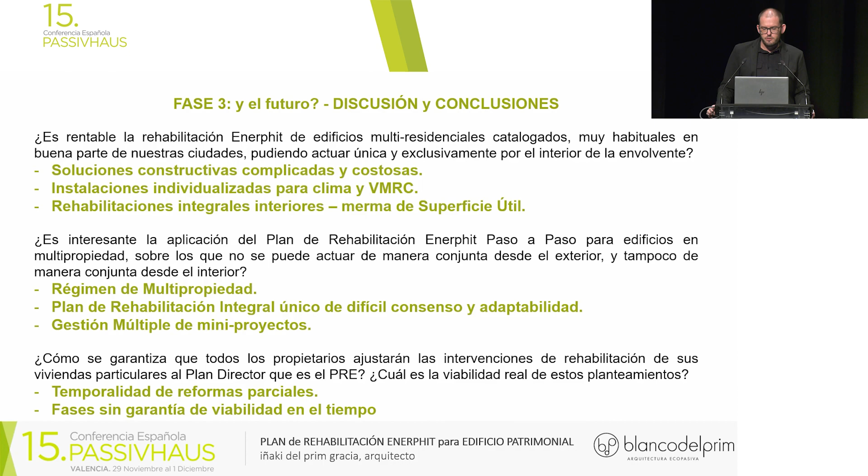Por lo tanto, cabría tal vez un debate: estamos aquí diseñadores, técnicos, certificadores, está el PHI, está Soraya. ¿Es este procedimiento de certificación el más adecuado para los edificios multipropiedad en España? ¿O sería más interesante buscar una manera de certificar viviendas individuales, o precertificar, o el sello que fuese, de forma que realmente se anime y se priorice hacer reformas de calidad en los inmuebles del país?

Eso era un poco lo que os quería contar. Gracias.

Pues ahora tenemos a Juan Bautista, arquitecto, que va a hacer la última ponencia de este primer bloque.

Muy buenas tardes a todos. Primero que nada quería agradecer a la plataforma Passive en España por haber decidido que nuestro proyecto valía la pena para estar aquí como ponencia. Para pasar es este. Vale, he pasado 2.

Nosotros somos un estudio de arquitectura, promotores y constructores aquí en la provincia de Valencia. Trabajamos tanto en la provincia de Valencia como en la de Alicante, y en cada uno de los proyectos intentamos incluir siempre uno o varios criterios de sostenibilidad que mejoren el proyecto.

En este proyecto, el proyecto de Campolivar, queríamos ir más allá y demostrar que la rehabilitación en el parque inmobiliario español podía hacerse desde un punto de vista todavía más eficiente que lo que exige el código técnico.

Veíamos muy interesante partir de la base, o ir acompañados en paralelo, de las exigencias de un criterio como el de Passive House Institute, de manera que pudieran corroborar que lo que estábamos diseñando y ejecutando era cierto. Eso nos obligó a ser más exigentes en cada proyecto para lograr el objetivo final.

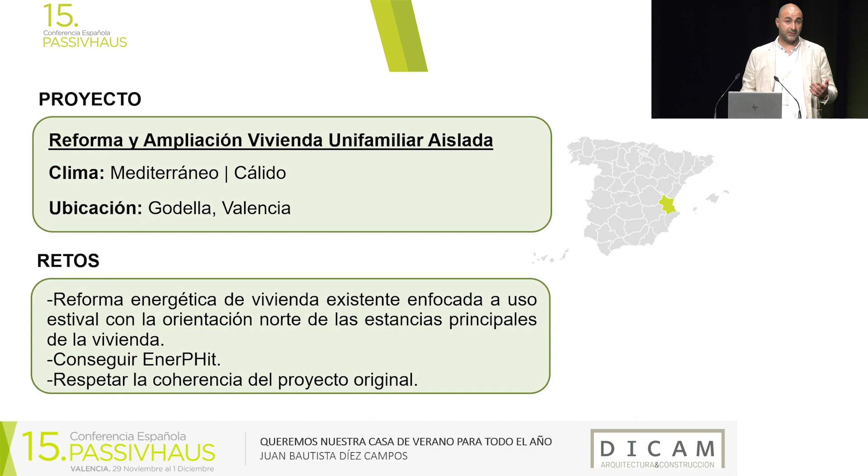Inicialmente los clientes aceptaron el reto, y la pretensión era conseguir el certificado EnerPHit respetando la coherencia del proyecto originario, con cada estancia volcada hacia el exterior en orientación norte, lo que provocaba déficit solar en invierno, pero en verano era un beneficio por el poco sobrecalentamiento de esa fachada.

Aquí vemos una serie de planos generales del proyecto. Consta de dos plantas: una planta general con el acceso casi a cota cero en la planta semisótano, y la parcela va creciendo de manera que la parte norte, orientada a sur, queda semienterrada. Luego la vivienda principal está en la planta baja, que sería la planta alta en este caso.

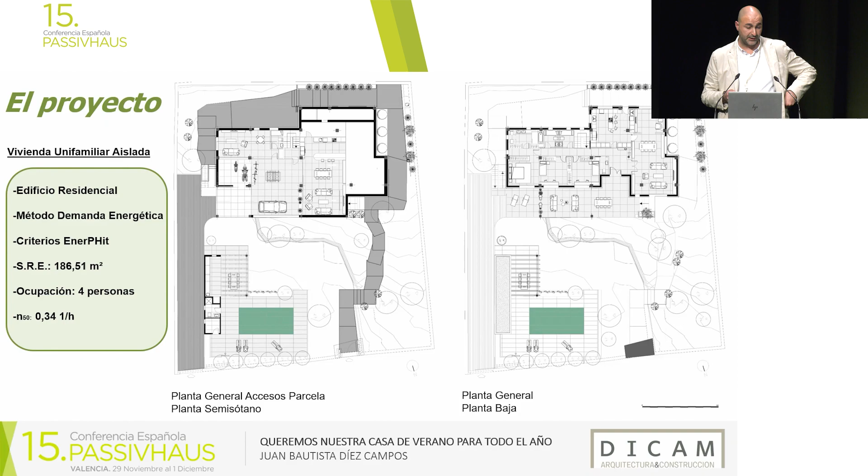Tenemos una superficie de referencia energética de aproximadamente 186 metros. La vivienda estaba estimada para 4 personas, y en el blower door final dimos 0,34 renovaciones por hora. Aquí podemos ver una serie de imágenes del proyecto.

Finalizado, junto con imágenes de los alzados de cada uno de los alzados del proyecto. El proyecto, como os decía, es una reforma integral de la vivienda existente y una ampliación de parte de la vivienda.

El proyecto inicialmente no partió ni nació como Passive House ni como EnerPHit, sino para mejorar la envolvente, porque la vivienda no cumplía para ser habitada todo el año. Sabíamos que teníamos que actuar en la envolvente, y aquí hay unas pinceladas de lo que inicialmente contemplábamos para cumplir con el código técnico e incluso mejorarlo, como una modificación estética en el revestimiento exterior de la fachada, con un sistema de aislamiento exterior, un SATE de 100 milímetros de EPS.

Luego, la planta semisótano: ese techo que separaba la envolvente de la planta principal de la planta semisótano se aisló con lana mineral y un falso techo de 60 milímetros, y un aislamiento bajo cubierta inclinada de proyectado de celulosa de 300 milímetros.

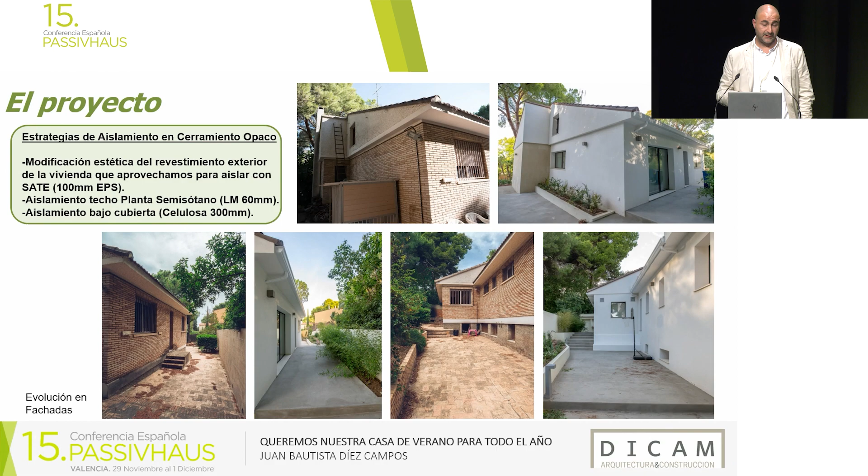Aquí podéis ver las imágenes del exterior en el estado previo y posterior a la ejecución, en el que vemos que era un ladrillo caravista existente en el revestimiento de fachada. Y bueno, aquí viene un poco la duda, ¿no?

¿Por qué Passive House, por qué EnerPHit en este tipo de proyectos? Nosotros en DICAM llevamos desde 2012 estudiando, yéndonos a viajes al extranjero para ver cómo funciona esto. En 2014-2015 ejecutamos la primera vivienda certificada en Comunidad Valenciana, y así pudimos certificar que lo que la teoría dice es real, se puede sentir, palpar y medir, tanto desde el punto de vista de humedad, temperatura, CO2 interior, y fundamentalmente el confort interior que da al usuario. Y ese confort se traduce en salud, ¿no?

Son 3 puntos fundamentales que, cuando hablas con un usuario de este tipo de viviendas, te dice que la vivienda es más limpia, hay menos polvo, y apenas hay ruidos del exterior. Obviamente, la vivienda está tan bien ejecutada con su aislamiento en todo el perímetro de la envolvente, tanto en opaco como en translúcido, es decir, en ventanas y cerramientos. La vivienda acústicamente funciona estupendamente, tanto en interior de ciudad como en exterior en ciudad-jardín.

Esto al final se traduce en que la calidad de vida de los usuarios es mejor, y todo ello hace que la salud de las personas que la habitan mejore enormemente en comparativa con una vivienda de código técnico o incluso existente. Lo teníamos clarísimo y sabíamos que empezaba la fiesta, porque para realizar una vivienda passive, diseño y ejecución tienen que ir de la mano, y sabíamos a lo que nos enfrentábamos.

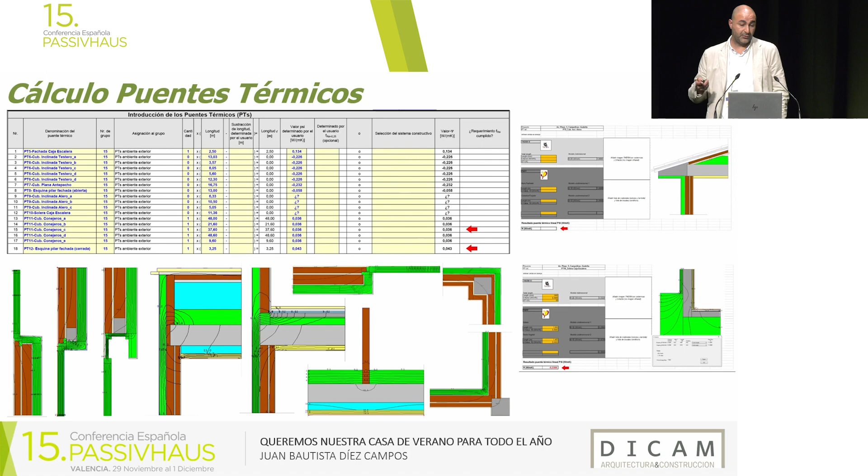En esta serie de imágenes podemos ver el aislamiento y la rotura de puentes térmicos. Entiendo que la gran mayoría somos técnicos y entendemos lo que es, pero hay mucha gente a quien rotura de puente térmico le suena algo extraño.

La rotura de puente térmico me gusta compararla con una chaqueta: cuando hace mucho frío, si no te subes la cremallera, en todo el pecho vas a tener frío. Eso es un puente térmico. Conforme me subo la cremallera, se cierra, hay continuidad en el aislamiento y tengo rotura de puente térmico. No sé si lo habéis entendido, pero esa es la estrategia que creemos funciona más rápidamente para entenderlo.

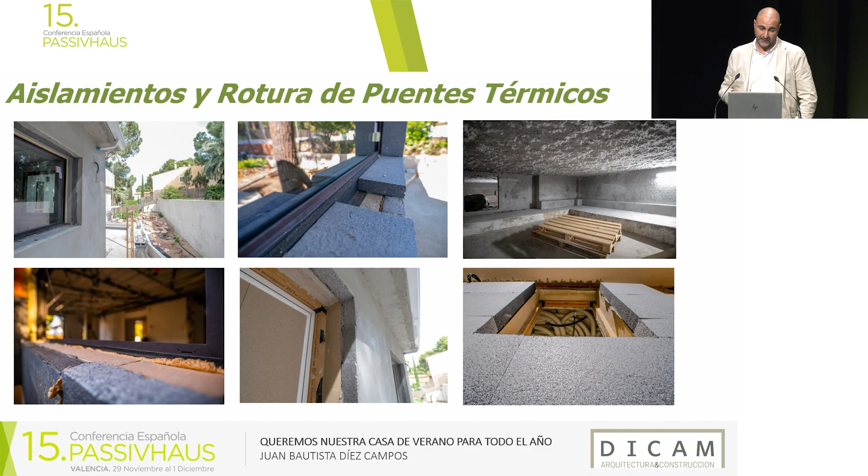Aquí vemos el aislamiento en fachada, alrededor de las carpinterías, la celulosa proyectada en el techo, aislamientos en alféizares y jambas. De nuevo vemos el aislamiento en la envolvente.

En esta parte de la cubierta plana que estáis viendo sería la ampliación de la vivienda, en la que al inicio había parte que era cubierta inclinada; se desmontó y se ejecutó una cubierta plana para uso de solárium.

En otras imágenes, en la de abajo a la derecha, veis la sala de máquinas, a la que le dimos un aislamiento extra debido a que, primero, estaba fuera de la envolvente, pero además estaba justo debajo de la habitación principal de los clientes. Le dimos un aislamiento extra sabiendo que esto haría que el comportamiento de los equipos fuera mejor.

La ventilación mecánica que le dimos al edificio también estaba en esa sala de máquinas, con un sistema domótico para ayudar a la implementación por parte del usuario. Al estar fuera del envolvente, necesitó un extra de aislamiento en cada uno de sus conductos hasta llegar a los silenciadores que estaban dentro del envolvente.

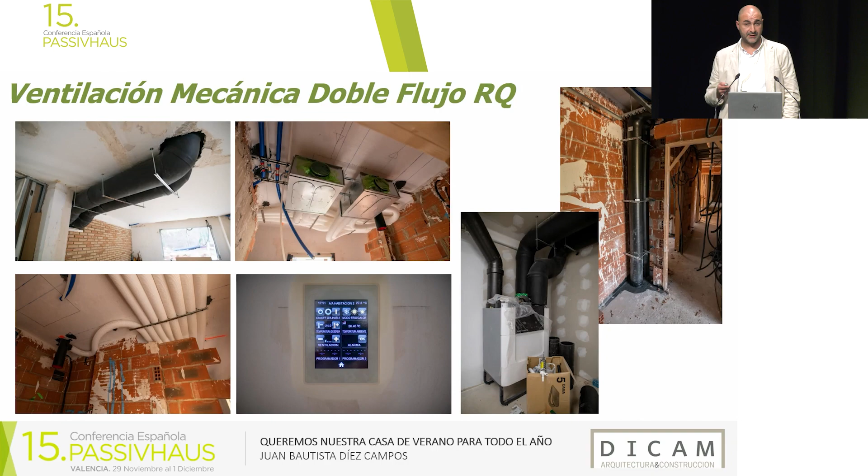La carpintería exterior del proyecto es una carpintería de aluminio con ruptura de puente térmico. Los premarcos son premarcos aislantes, de manera que nos permitían darle continuidad a ese aislamiento en la fachada y no romper la regla del lápiz o el red line.

La hermeticidad, bueno, es una rehabilitación, intentamos solucionarlo sobre la marcha, porque hicimos una demolición total de la vivienda para hacer una redistribución, y ibas encontrando las marcas de los tabiques previos en los forjados existentes. Con lo cual había que ir o bien con pintura mineral hermética o bien con cintas, sobre todo en la zona de carpinterías y premarcos.

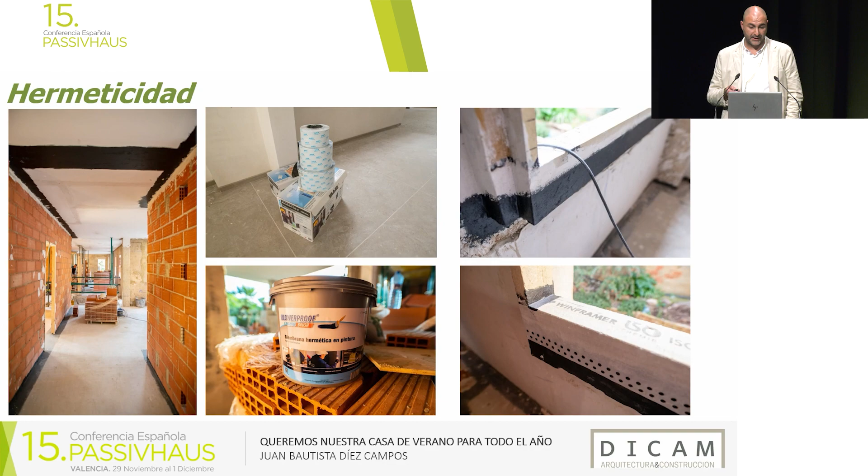Inclusive, fijaos en la primera foto de la derecha, que teníamos cintas entre premarco y obra, premarco y marco, y aún así le dimos pintura hermética. Al final es un tema de desconfianza, ¿no? Porque cuando sabes que esto funciona, no te hace falta poner doble cinta, con solo una cinta lo puedes ejecutar, pero siempre existe esa desconfianza y el querer aprobar el examen final del blower door.

De nuevo empezaba la fiesta, y el día del blower door para nosotros es el día del juicio final, porque pone a prueba lo que tú has estado diciendo, hablando y ejecutando, si es real o no. Inicialmente hicimos en el estado previo de la vivienda un ensayo de blower door, nos dio 11,21 renovaciones.

Para los que no entendáis lo que es la renovación de la prueba blower door, rápidamente: la vivienda cada hora está renovando 11 veces su aire interior, con lo cual la climatización que necesita es continua y constante.

Sin embargo, en una vivienda bien ejecutada que no tiene esa infiltración de aire, necesitará menos calefacción y menos refrigeración. Hicimos un blower door en ejecución, en el que dimos 0,22, y en el final de obra empeoramos un poquito, pero estábamos por debajo de Passive House y, por supuesto, de EnerPHit. El criterio de llegar a EnerPHit lo habíamos superado, inclusive podíamos optar a casa pasiva.

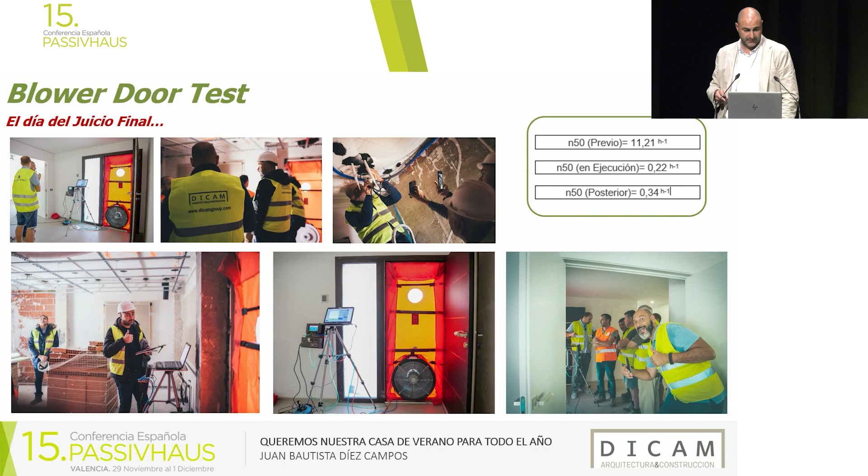Este proyecto es de los años 70, tenía una serie de curiosidades, como que la fachada exterior estaba hecha con un ladrillo caravista que en su día se utilizó para una reforma en la Catedral de Valencia. La fachada existente era un caravista, una cámara de aire de 3 centímetros de poliestireno y un ladrillo hueco del 4, con lo cual ya sabíamos que teníamos que mejorar esa envolvente.

Tenemos un aljibe de recogida de pluviales en el proyecto, que el municipio no exigía, pero los clientes lo querían. La parcela en su momento tenía menos suelo duro ejecutado.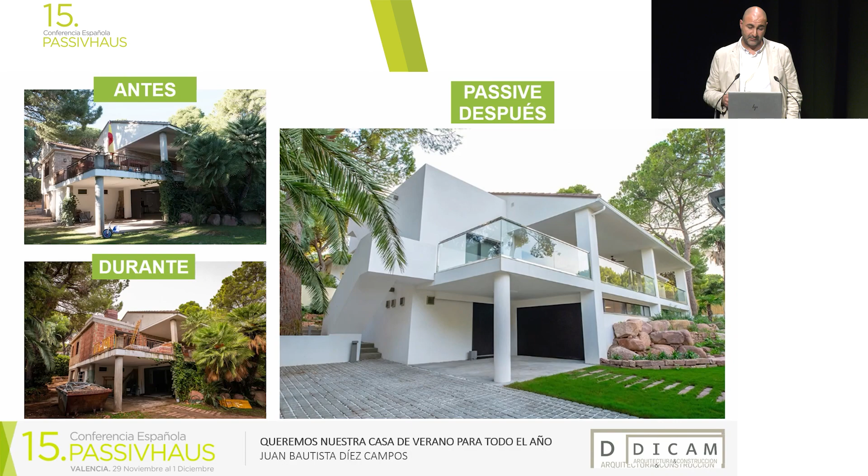Imágenes exteriores del proyecto: aparte del proyecto de arquitectura interior, hicimos un proyecto de diseño de reparcelación y de urbanización interior. E igualmente, en el interior de la vivienda hicimos un proyecto de interiorismo, en el que acotamos cada una de las estancias en paralelo al proyecto de Passive.